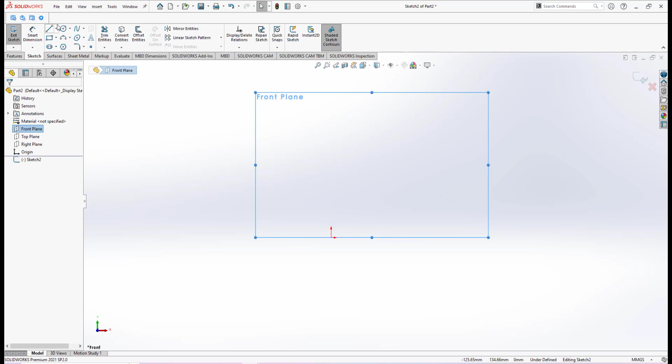In Solidworks, make sure the unit is MMGS, then we will work on the front plane. In this front plane, I will create a center line from the origin, and the dimension of the container is 110.

Then I create a line at the top, horizontal, and give a dimension. Since the diameter is 125, the radius will be 62.5, and since the bottom diameter is 90, I will create another line here, and the dimension is 45.

Then I will do a spline here. For me to create this curve, I will do a straight segment here. First I will create a vertical line from here to here, with a dimension of about 8.

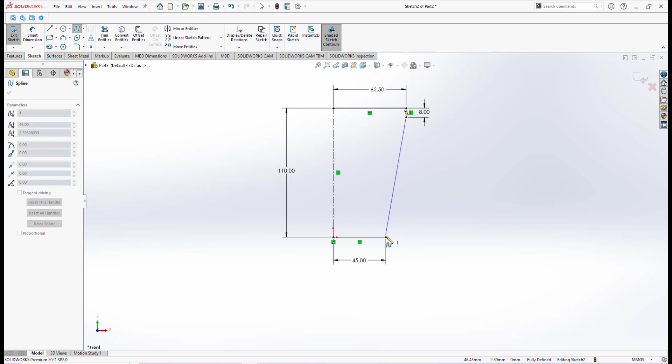Then for me to do this curve, I will do a spline. So here we have spline, then I will do the spline, just only a 2-point spline, and click OK. At the first angle, I select the arrow and the control point here.

Let's make sure that it flows to vertical. So let me do some adjustment of the spline to make sure we have contours like as shown here. Okay, I think the curve is about right.

So then what I will do is close this shape and connect to this line. I will do revolve boss base, and the axis of revolution is this line, making sure it's a full circle. So now we have the base shape for our bottle mini blender container.

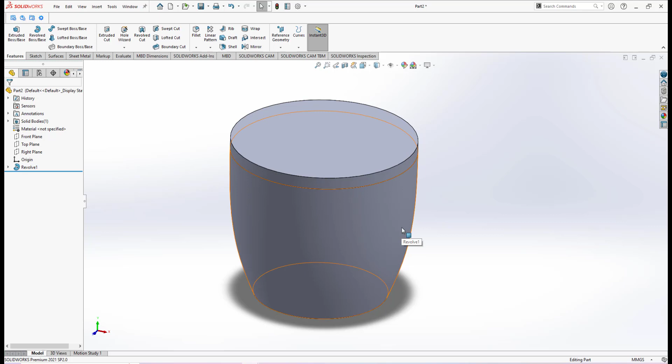In order for me to do this cutout of the bottle container, the best approach I found is to use the most basic method - a revolve cutout. I've tried using a wrap command and also a projection method, and I think it's quite tedious to do the cutout using that approach.

So the best method to make this groove is to use a revolve cut with a certain angle, about 40 degrees. Let me show you in Solidworks.

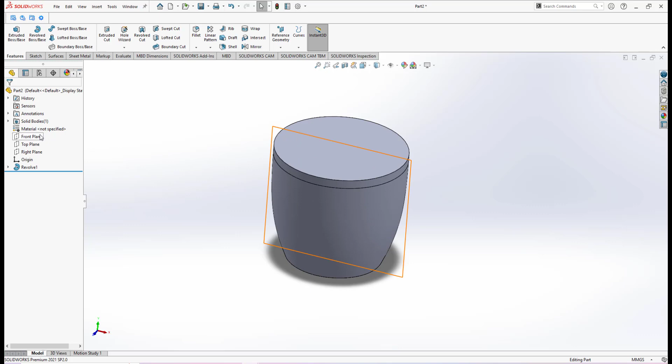So I will work on the front plane, create a sketch here, and first thing I create a center line here from this base up until that middle point.

So my approach to do this cutout is to use revolve cut. It means I have to create a certain profile - a proper shape here to be cut out, revolved at an angle of 40 degrees.

In order for me to do this cutout, I will select these edges, then convert those edges to entities, so we have a trace of that edge. Let me go to normal view again.

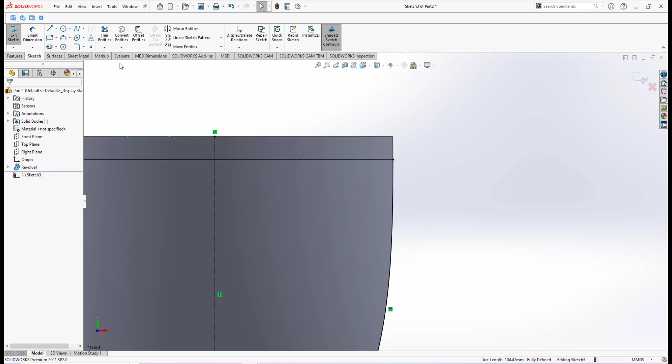So what I will do is duplicate this edge. To do duplicate, I will use the copy command - take note on this. I have this edge, and to copy it to the left, we have an option under sketch, under move entities - we go for copy entities.

Entities to copy will be these edges that I just traced, and the distance - if you look on the axis, to the right is positive x-axis, but we have to copy to the left, so it will be on the negative x-axis. The distance I need to copy is about -3, so here delta x I will put -3. This will create a copy of it, and I just click OK.

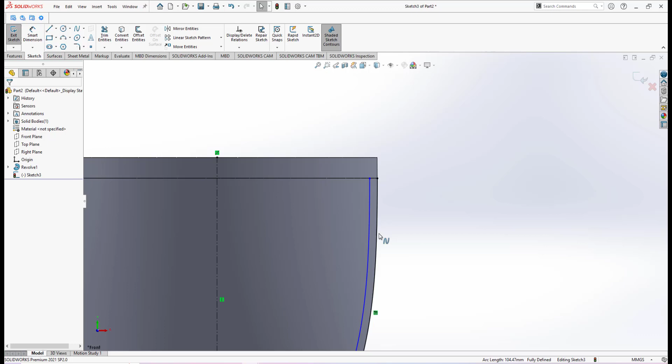Click OK, and now we have a copy version of the trace of the edges. Another thing - the cutout, I already measured it, so I make a line from here to here, a straight line up until it touches that edge. The distance from this line to this endpoint is 3, and also this dimension is also 3.

So I have this, and I also need to close it. Then I create the line from here to here to close the loop.

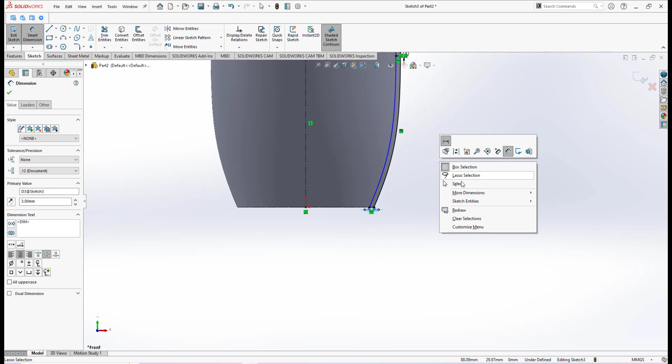I also give a dimension of 3. So in order for me to do this cutout, it's not quite necessary to make it fully defined, as long as I have the closed shape and give some distance here.

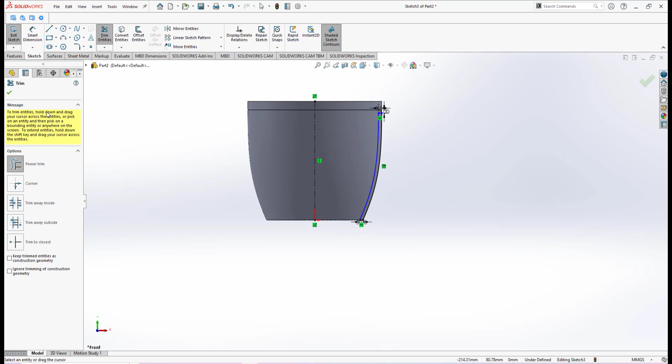Okay, then this portion will be trimmed. Let me trim this portion. So I have a kind of enclosed shape for me to do a revolve cut. Then I click OK. So this will be the portion for me to do the revolve cut.

So we go to Features, we go to Revolve Cut. It's already set under axis of revolution. If I clear here, the axis of revolution will be the center line, and it already detects the profile to be revolved, but we're not using a full circle.

I only need to revolve cut a certain portion, so I'm not using blind, I'm using mid plane. Using mid plane means it will revolve cut in both directions, and the angle is about 40 degrees.

So this portion needs to be revolve cut. Then I click OK. So we have a cutout of the base shape of this container.

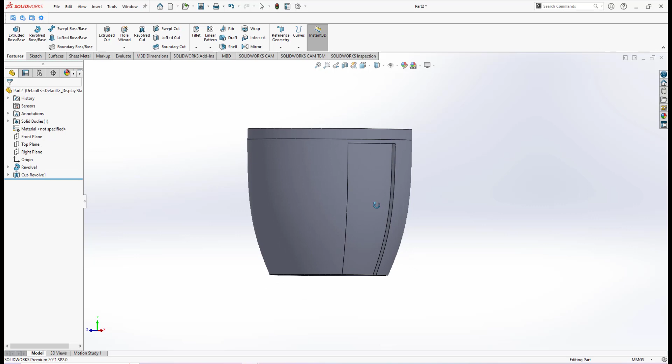After we have made the cutout, I will do a fillet, since in this photo they have a fillet at the bottom here, and the fillet radius is about 5 mm.

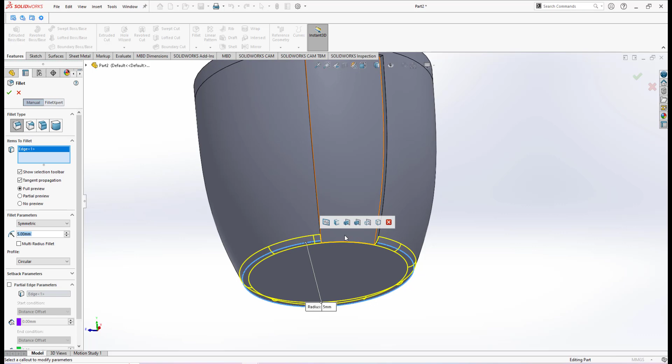So under Features we go for Fillet, the radius is 5 mm. Then we select all the edges, including these edges. Let me clear this first. I go for this fillet, then I call Fillet again to fillet these other edges for 5 mm. It means we have to do fillet 2 times.

Okay, at the bottom we have a fillet of 5 mm. Then I will fillet these edges of radius 15. I select this edge and also this edge of radius 15.

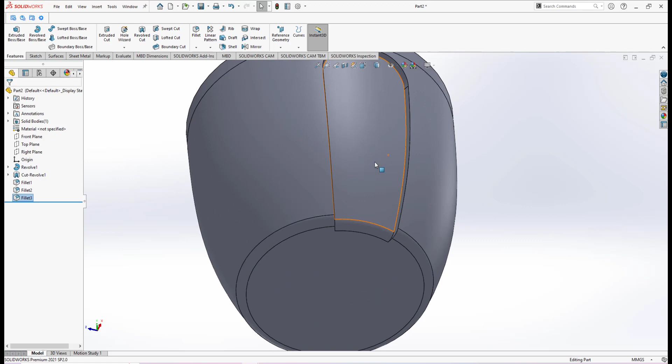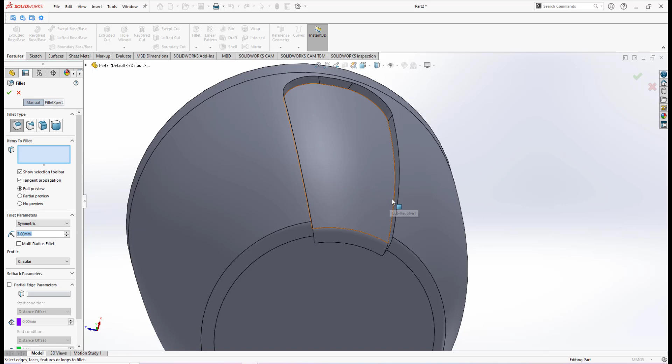Okay, we have... the next thing is at these edges, since these are all sharp corners, sharp edges, so I need to do fillet at these edges. For these edges I will do fillet of radius 3, and I select these edges, so we have a more curved surface.

Then I click OK, and I do fillet again of radius 1 for these edges, so we have a more curved surface rather than sharp edges.

Okay, the next move is for me to do a repeated pattern of this groove. If you look in this photo, this cutout here has a repeated pattern of 4. So in SolidWorks I will do a repeated pattern of this.

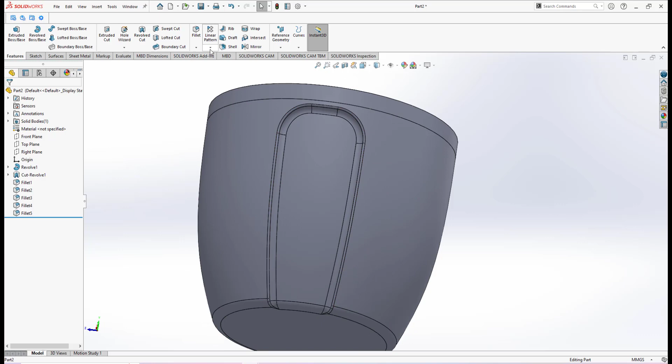Under linear pattern we have circular pattern, then for the direction I will use the cylindrical surface, and the angle is 360 degrees, and the number is 4. Be careful about the features selected.

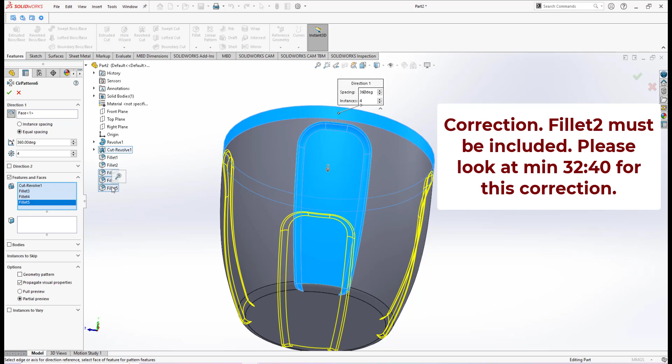Then I click OK. So I have the repeated pattern of this groove.

If you look in this photo of the sketches, the bottle container thickness is 2 mm, so I will do Shell to give a thickness of 2 mm. Under Features I go to Shell and give the thickness of 2, select the top surface, and click OK.

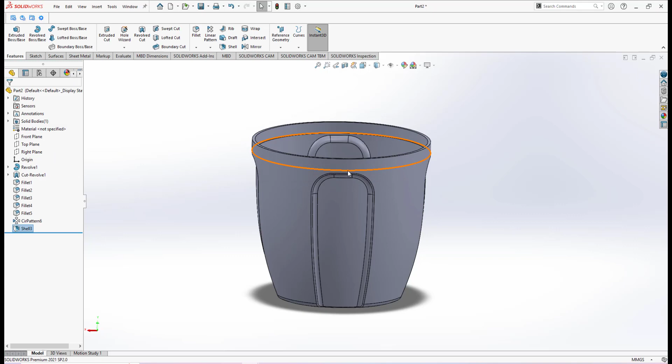Sometimes SolidWorks reminds you of the minimum radius of curvature, but for this training purpose, we just simply click OK, as long as it forms the thickness of 2 mm. So now we have a bottle container.

Another thing to do: if you look at the appearance of this original bottle container of this mini blender, the appearance of this groove is kind of like a straight vertical cut. So I make a certain modification.

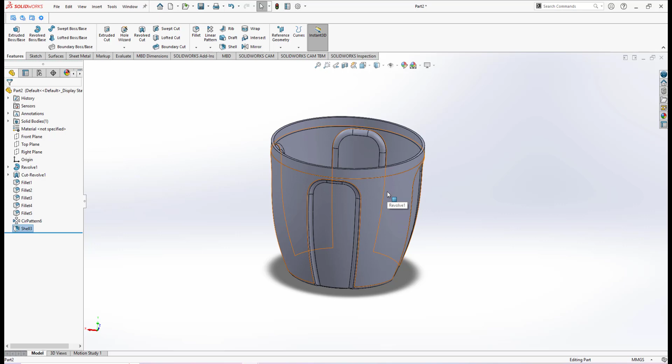I want to make it twisted with a certain angle, because since this is a mini blender, when we pull the handle it does a kind of spinning of the rod at the middle and the cutting blade. So I need to make the appearance look more pleasant.

So the groove here, I want to make it twisted at a certain angle rather than the original one, which is just a straight cutting, vertical cutting.

So I just make some modification to improve the aesthetic look of this bottle container. The groove here, I want the appearance of it to be twisted at a certain angle. To do that in SolidWorks, we can do that under Insert, Features, we have Flex.

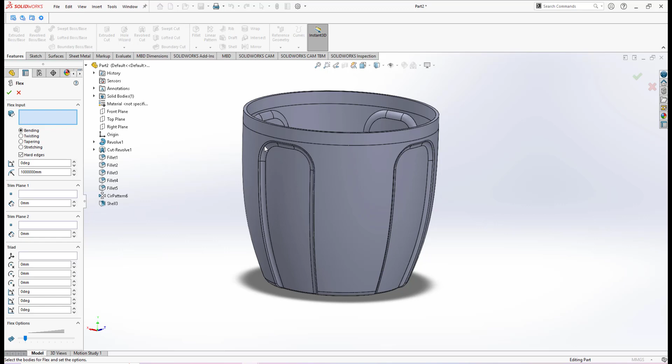The command is flex. Flex lets you change the shape of your solid object. We have some menu options here, but the thing I want to do is twisting.

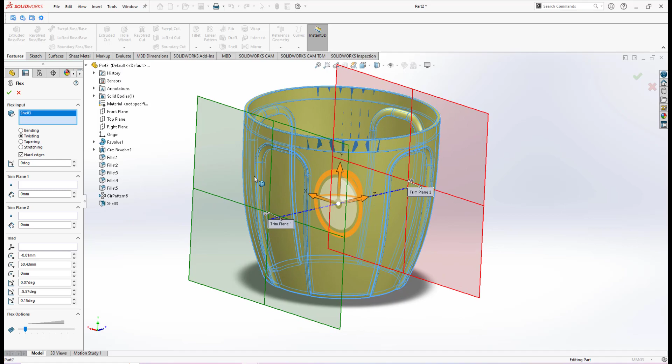Make sure I click on twisting, because I want to do a twisting effect at an angle. The flex input here will be the body of this container. This is a gizmo setting for how we control the twisting, but it looks like the twisting effect of the red plane and green plane goes in the Z direction. So this is not the direction of orientation or twisting that I want.

If my twisting should be at the top and bottom plane of this green and red color, in order to do that, make sure under X here I go for 90 degrees, and the remaining Y and Z I put at 0 degrees. So the setting of my twisting for both the green and red plane is right.

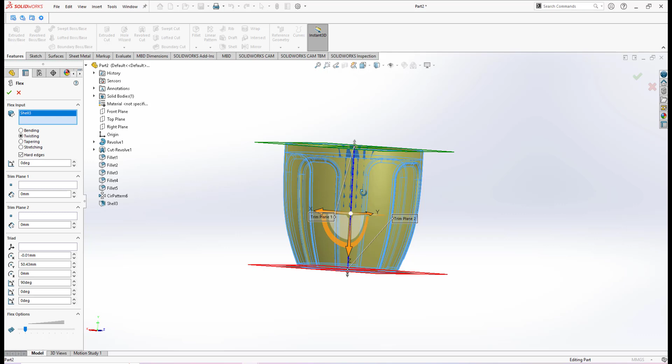Under here, the angle I want to make 45 degrees, so it goes in the direction of 45 degrees. Then I click OK. We have to wait for a while for SolidWorks to calculate it.

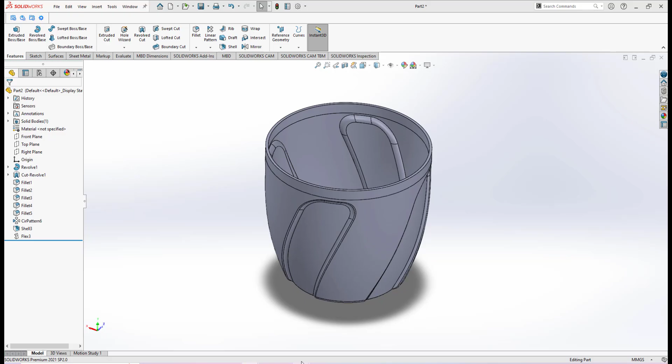So I have a twisting effect now. To me, this looks more pleasant compared to the original one, which was simply a straight cut. This looks more aesthetic than the original.

All right, let me save it. Save it as container.

Our next move, if we look again in this sketching and zoom in a little bit, we have a cutout here at the top edge. We have a cutout of 5 deep and 0.5 thickness for the cutout.

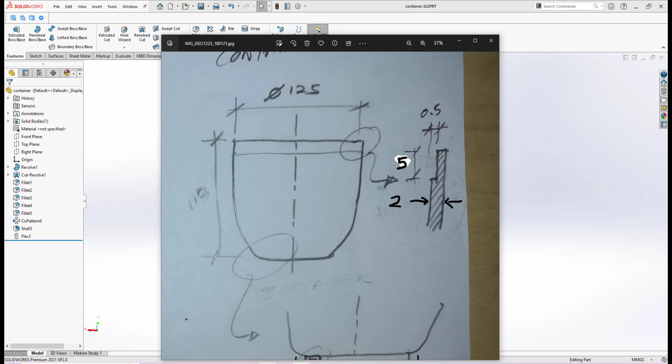So what I will do is use this top plane. I create a sketch at that top plane. The distance of the cutout is 0.5. Let me select this, making sure we select the proper internal edge.

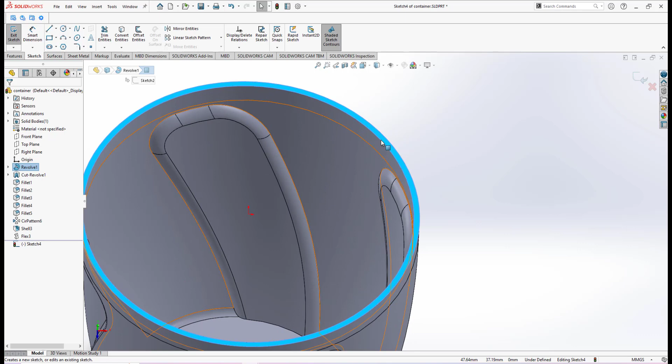Select this edge and convert it to entities. Then I do an offset of 0.5. Then I select this edge and make sure to go for reverse, into the inward direction. Make sure to uncheck reverse so you go in this direction, giving us an extra 0.5 here.

So I have these two circles to use as my profile for the extruded cut, with a distance of 5. If you look here, the sketch depth is 5, so the distance of the extruded cut is 5. So we have our cutout.

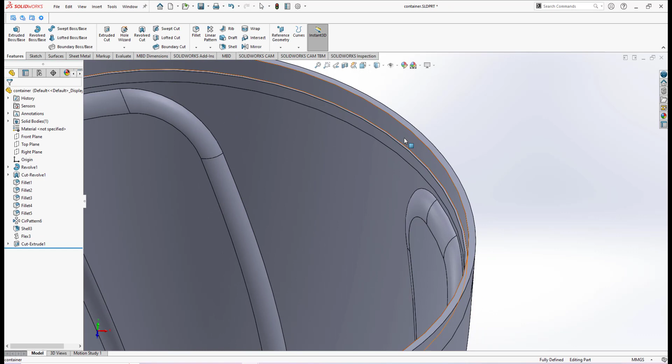This cutout is meant for us to mount the middle plate that I already did in the previous video. It will be mounted until it stops at this plate.

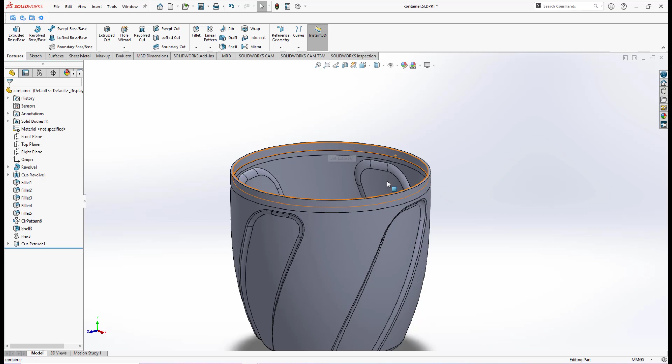Our next move is that I need to insert the middle plate component that I've done before into this container modeling. The reason I insert this middle plate into the bottom container is to put it into the correct position so I know the position of the key.

If we look at the middle plate that I've done before, we have a slot here. At this container, after I put this middle plate at the correct position, I will know the location for me to do the key.

So the key will slide into that slot, then it will lock the middle plate to this container.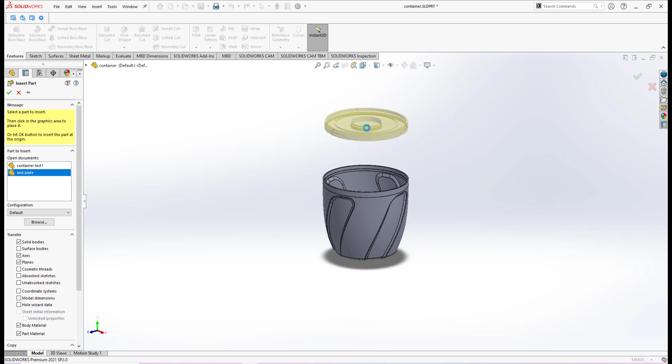In this container modeling, I will insert a part - the middle plate. Make sure it's somewhere at the top here, then click OK. Just click yes.

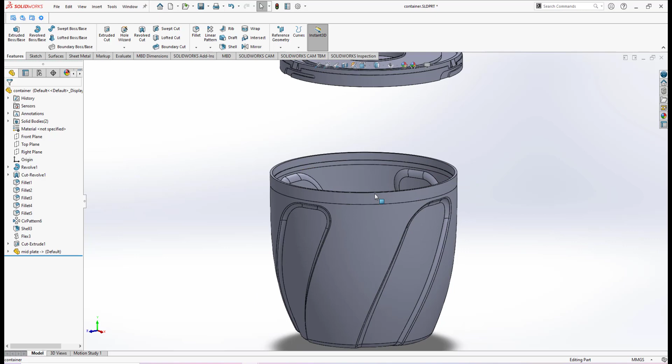One thing I found out - since in this container modeling I previously did a twisting effect, when I want to do a mate setting with a concentric relation on this cylindrical surface, unfortunately SolidWorks loses the properties of this cylindrical surface because of the flex modeling twisting. So SolidWorks has lost the concentric surface reference.

This means I have to create an extra circle here. At this plane, I create a sketch and just make a circle, making sure it's snapped at the center at any radius. This circle will be used as a reference for our mate setting relation for concentric.

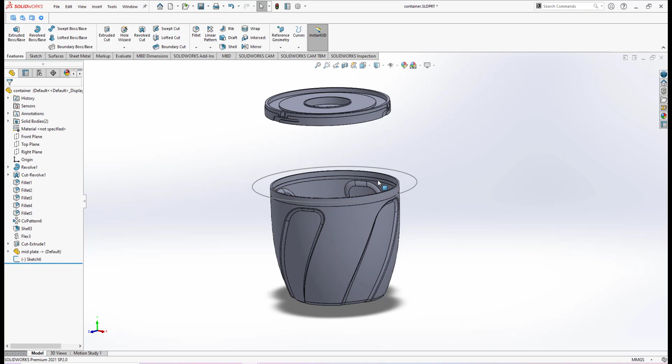This means we need to position the middle plate to be concentric with this container. I will go to move/copy features to move this middle plate, under the mate setting. That's why I created the circle here on this bottle container.

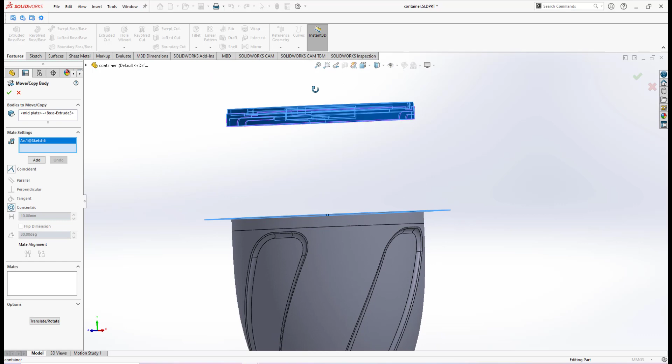I create a circle to be. I have the relation of this edge of this circle to mesh at any circular edges of that middle plate, so it has a concentric effect.

Then I click add, so the middle plate is positioned to concentric. The next move is to select this bottom surface of this middle plate to be coincident with this bottom surface. Then I click add, then I click OK. Now our middle plate is in correct position.

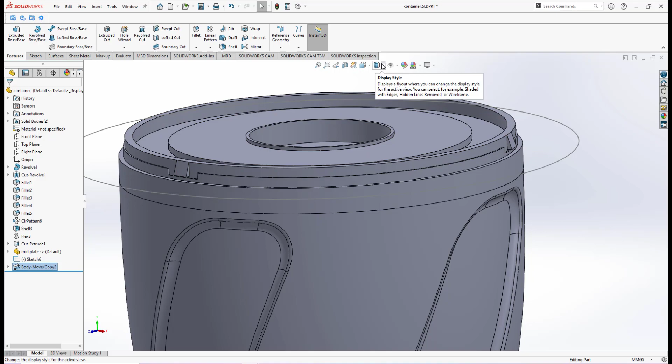From here, I need to know what is the distance of my key for the slot of the middle plate. So in the display style, I can switch to wireframe mode. If you look carefully, this is the slot of the middle plate, and this is the top surface of our container, so it means I have to create a key at this position.

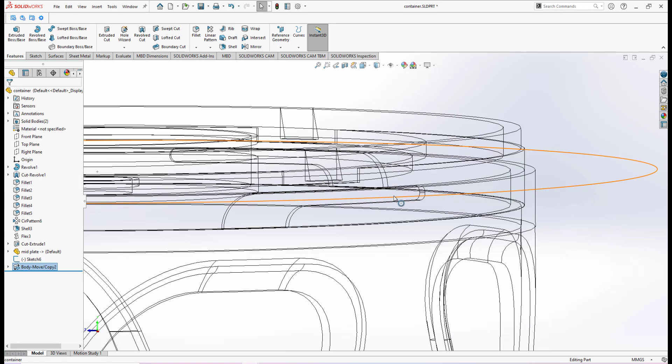I have to create a key, but I also found out that the radius of my slot of this middle container is 2 millimeters, the thickness, so I think it's too small. I need to increase it a little bit to make it like 3 millimeters. So I open the original middle plate modeling.

This is my middle plate. I've done this one, if you look, the distance, the radius is 1, which means the distance of the slot is 2. So I need to increase it a little bit.

So I do the wrap command here, this is my wrap sketch. I increase this one, instead of 2, to 3, to increase the thickness. So it means I have a bigger slot.

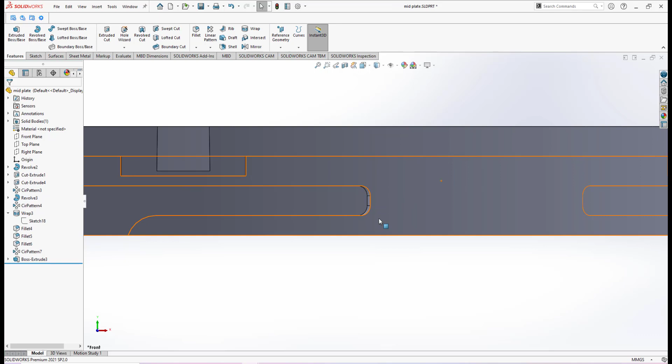Also the radius is not correct, so the fillet radius also needs to be changed. I edit the fillet. Since the thickness is 3, the fillet radius is 1.5. So we have a bigger thick slot distance.

So then I save my middle plate, then go back to the container part modeling. When I update it, my slot is a little bit larger than 2, it's 3 millimeters.

I can use this as a reference for me, checking the distance from these edges to this point. Let me evaluate and measure these edges to this point. We need to know the distance y. Distance y shows 1.5 millimeters.

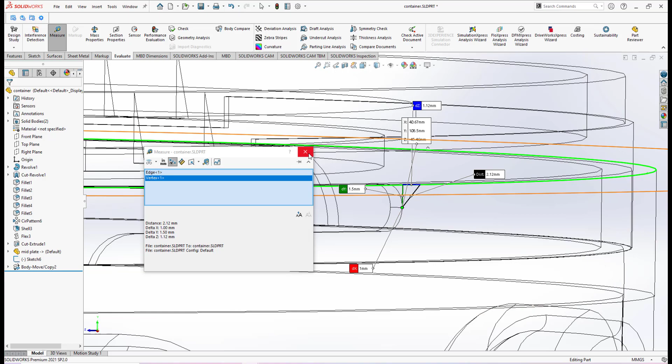So I know the position where I will create the key for the slot. I hope you understand what I try to explain. Under the features, let me go back the display style to shaded mode, then I will isolate this container.

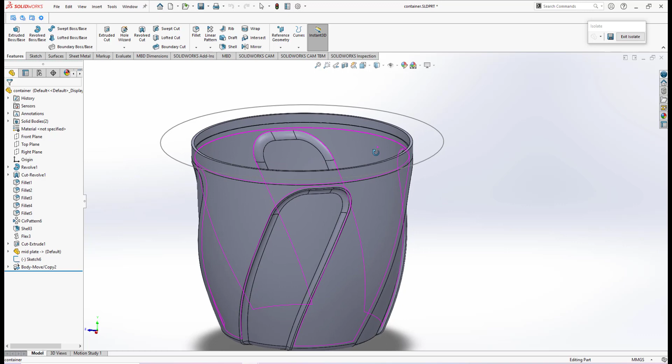Let me drag it here. Then I will create a plane, 1.5, using reference geometry plane. My first reference is this top surface, and I set 1.5 as the distance, and I go to flip offset, so it goes downward. So we have this plane number 7, 1.5 from the top surface.

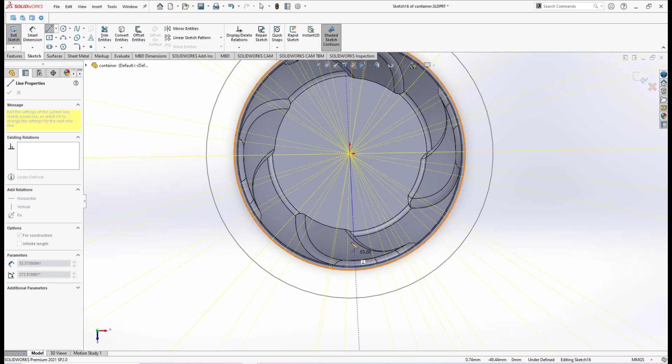So on plane 7, I will create a sketch. I will create a center line from the center point to this quadrant of the circular edge. That's one disadvantage, remember, this center line cannot snap to properties like the quadrant of the circular edge, that's the bad thing when we use the twist effect.

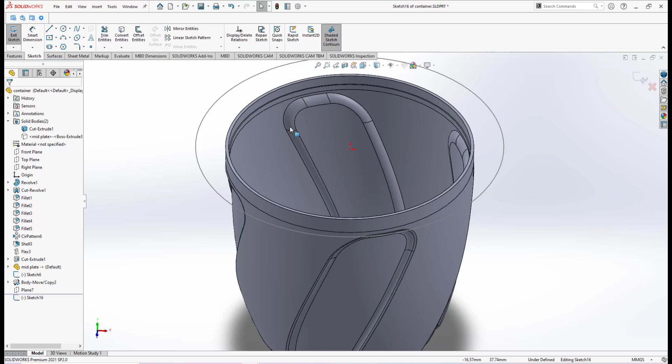Remember, I did twisting here. Since I did some twisting of this groove, Solidworks has lost, this container has lost all the properties like circular edges, cylindrical surface, and so on.

So in order to overcome this problem, let me exit this sketch. I remember the circle that I did here, this circle I can edit. I give it a proper dimension. Since the top diameter of the container is 125, I put a dimension of 125.

So I exit the circle. We can use this circle as a reference for our plane 7 to create the center line. So I go to plane 7 again, which is 1.5 below, and I create a sketch on this plane 7.

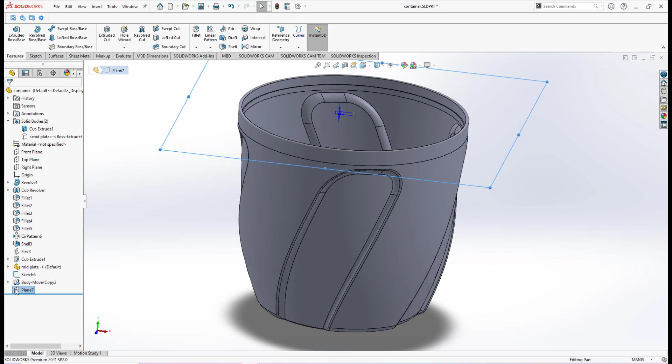Then I create a center line from the center point, and now it will snap to the quadrant of that circle. I just adjust the dimension. That's the reason for me, then I exit the sketch.

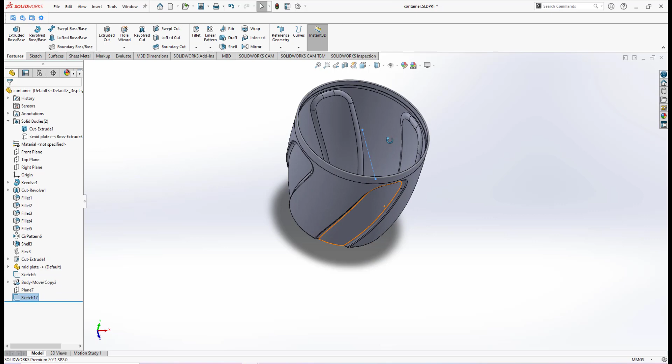The reason for me to do this center line is to create a normal plane, since I want to create a key at this internal part of this container. The key will be slid into the slot of this middle plate. So in this container, since I have already created the center line, I will create a reference plane.

So select the line and also the endpoint of the line. So I have a plane, plane 12. Okay, sometimes when you do things, your plane does not appear on the screen.

Sometimes make sure that under Hide/Show, your plane is not checked, it's unchecked. Whenever you create a plane, it will be hidden. So make sure that under view, the Hide/Show, your plane is checked, so it will show the plane.

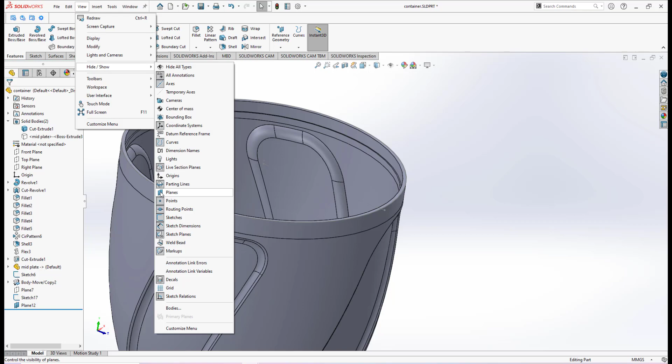This plane 12, actually I want to use not this plane 12, I will use it as a reference. This is my first reference at a distance of 3, but I go to flip offset, so I have another plane to the other side.

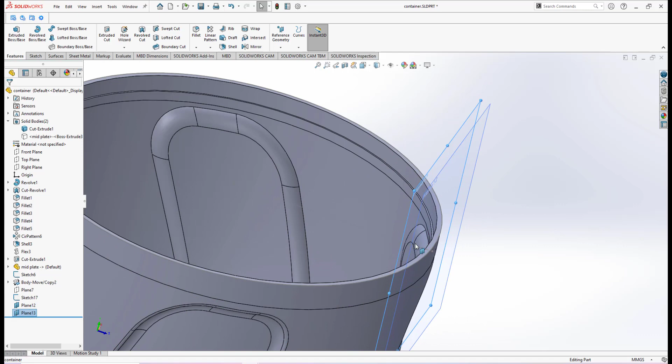So that plane 13 will be the location for me to create the key. So this one, the plane 12, I turn off. So this plane 13, I create a sketch on it. So I have a normal view.

Then I will create a center rectangle here, anywhere on the screen. Then I will position the center rectangle. I select the middle point of the rectangle and hold down my control key and select the center line and make pierce. So it will position the rectangle to the origin point.

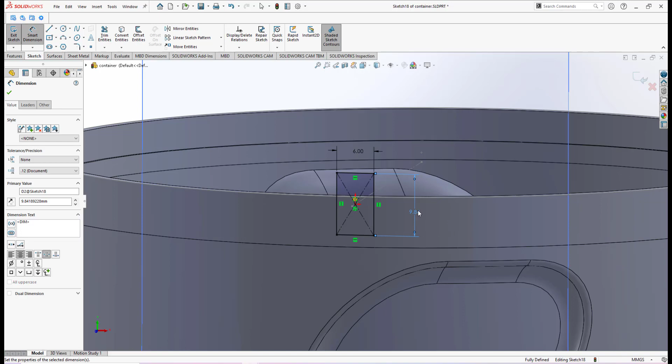Then I give a dimension of the length of this key is 6, and also the height is 2. So this will be the profile for me to create the key of this container. Let me drag the view. Alright, then I will do features.

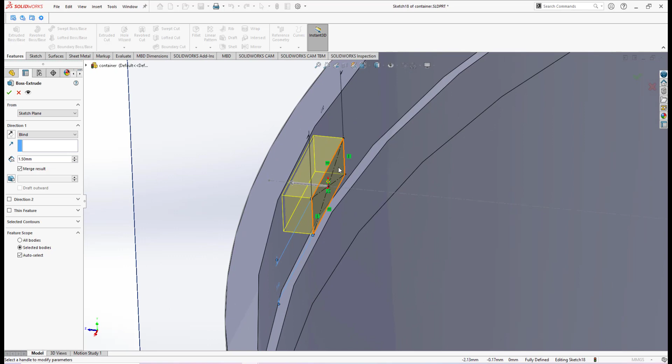Okay, this is very important. Then I will do extruded boss base. The option that I use for extruded boss base is not from the sketch plane. So when you use sketch plane, it means your starting point is a flat surface. But for my key, instead of using sketch plane, I have an option here from surface plane.

From surface plane, then I select this internal surface. So it will start at that surface. Then I can give the distance, the length of my boss extrude. So the length, since the direction is outward, I need to click reverse direction. So we will go to inward direction.

The length will be 1.5. So it will create a key. But one thing that is also very important, I will not check the merge result. I will uncheck merge result, because this will make a separate body of the key.

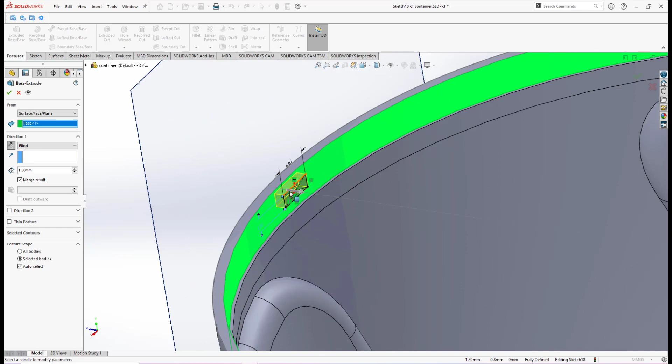Why do I not click the check? If I click merge result, since there will be kind of... I've already done this just to remind you, for this kind of key, I will uncheck the merge result, so it will create the key as a separate body. So then I click OK.

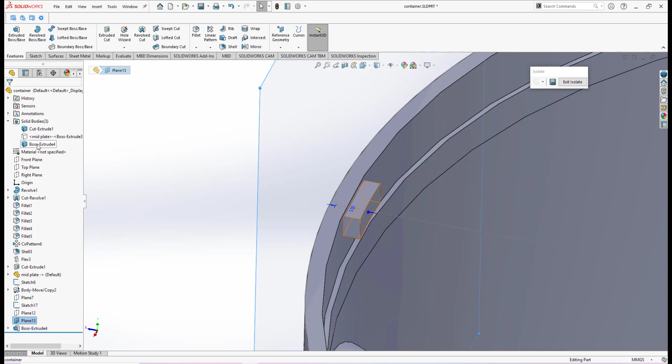So then I have a key at this position. But if you look under the listing, we have 3 bodies here. One is cut extrude, the container, the mid plate that we just hid, and boss extrude is the key.

Alright, then the next move is I will do a fillet to this key. I will do fillet since the thickness is 2, so my fillet is 0.5. So I will fillet this... the thickness of this key is 3, so the fillet is 0.75.

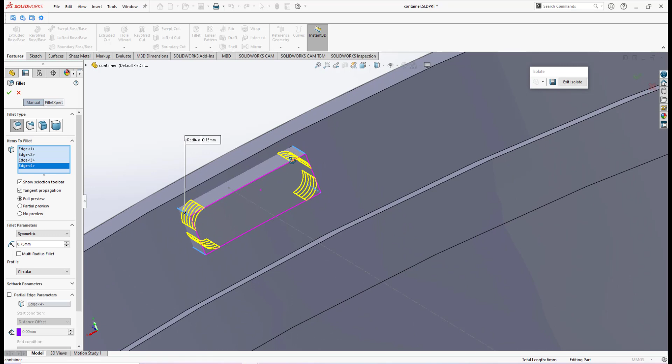So I select all these 4 edges. My mistake, my mistake is 1, supposed to be 1. Since the thickness is 2, the fillet will be 1. Alright, so this will be the fillet for the key.

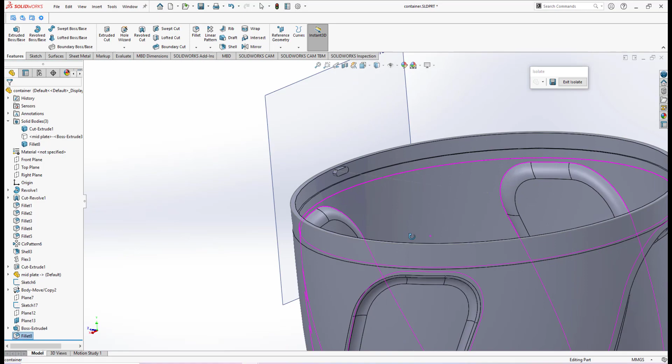So this key is a separate body. So what I will do is circular pattern. Circular pattern of this key. Remember, if I try to do circular pattern, when I try to go the direction, any cylindrical surface of the container is already deleted. Why is it deleted?

Because I have used a twisting effect here. The one bad thing about twisting effect, when you do a twisting, the properties of this container lose the property of cylindrical surface or circular edges. So my reference will not be this bottle container.

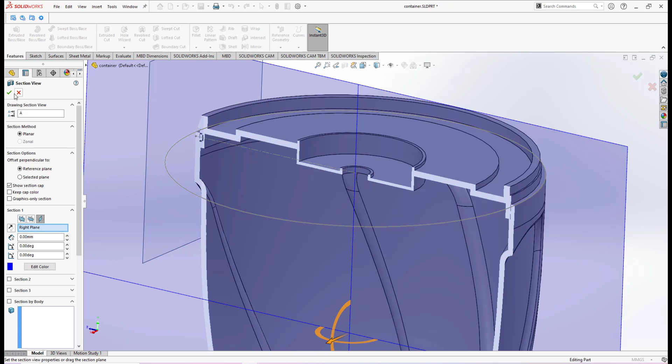So I exit the isolate. So I have this middle plate. I will use the cylindrical surface of this middle plate to be the reference for my circular pattern. Let me go for section view so I can see the key. Alright, so this is a section view. Okay, now I can do circular pattern.

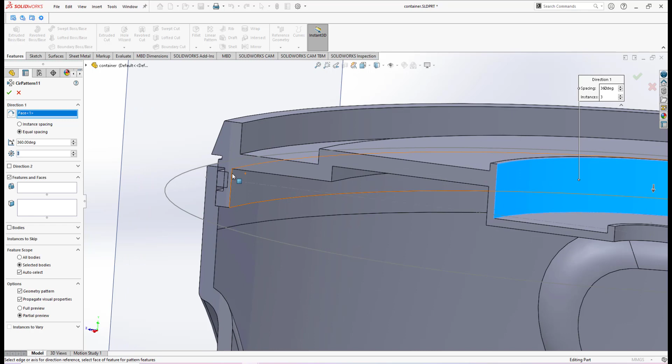Under circular pattern... sorry, under features here we have circular pattern. Okay, for direction I can go for the cylindrical surface of this middle plate, and the angle is 360 degrees. The number is 3. But I'm not using features because since I need to circular pattern the key, and the key is a separate body, instead of features, I check bodies.

We circular pattern this body. So I select the key, then click OK. We will have 2 more of the key. Let me uncheck the section view and hide this middle plate. As you can see, we have 3 keys after we've done the circular pattern.

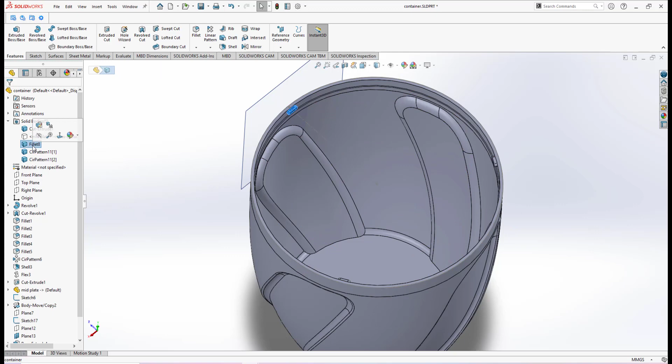These 3 keys are separate bodies. If you look here, we have one key, a second key, and a third key, all separate bodies. So we need to join them to the container. To join it, I go to Insert Features, use Combine, then Add, then select the container and select these 3 keys to be joined as one. Make sure the option is Add, then click OK.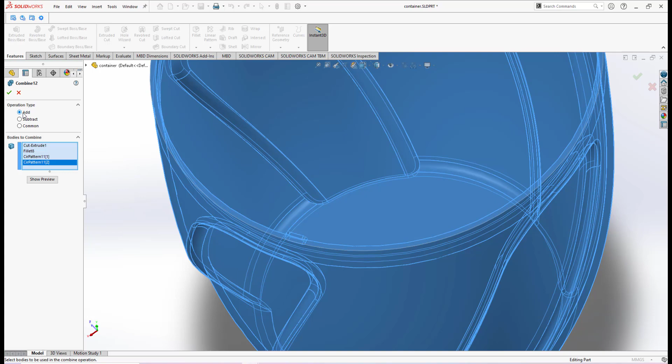Alhamdulillah, I've completed this container with 3 keys. The next thing to do, let me check this container.

Alright, I think I made a silly mistake here. If you look at the cutout, previously I showed you how I made the cutout of this groove, and the pattern is 4. I forgot to include this fillet into the features of the circular pattern, so we don't have this cutout fillet here. So I need to edit my circular pattern again.

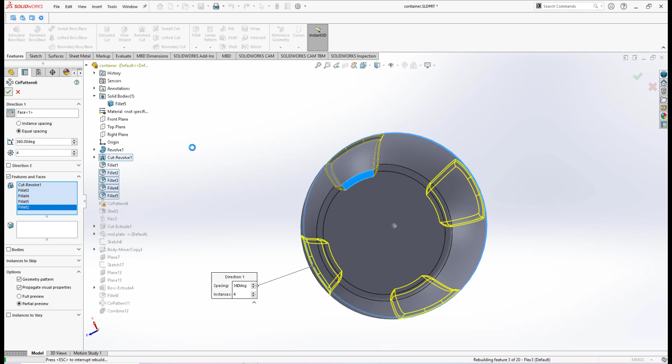In these features, I need to include the fillet too, and then click OK. If a rebuild error happens, I have to check the geometry pattern, click OK, then click OK again, then wait for Solidworks to do the recalculation. Now it looks okay to me, let me check.

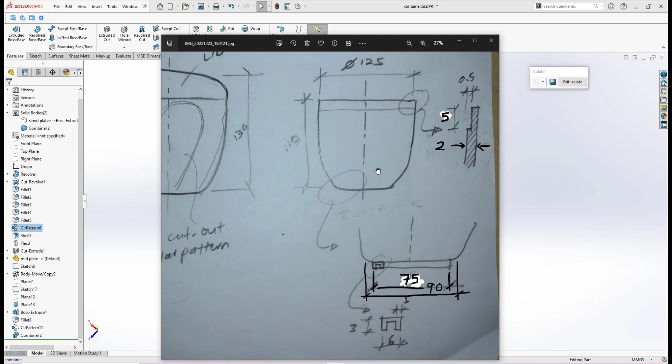Alright, okay. The next thing is, if you look at this photo sketch, I already made a modification. At the bottom, we have a protruded cutout cylinder, the height is 3 and diameter is 75. These are the cross-section shape of the cutout, and I can do this by revolve boss to the center line. I have to do the cross-section at the bottom of this container.

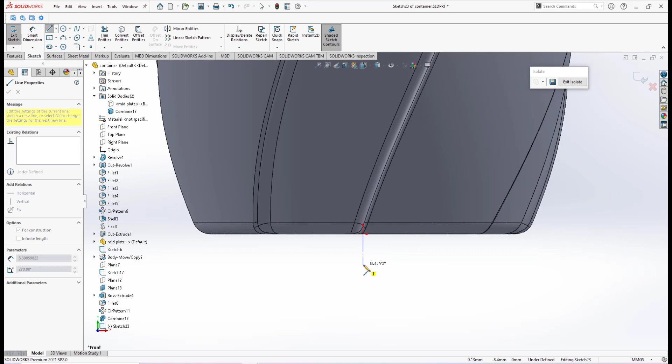So let me go to the isometric view, then under the front plane, I'll draw a center line here, make a center line, then draw a cross-section shape, making sure it's snapped at the bottom edges. Let me zoom in a little bit. I draw the cross-section shape as shown in this photo. The cross-section shape needs to be revolved, the length is 6, the height is 3, and all the thickness is 1.

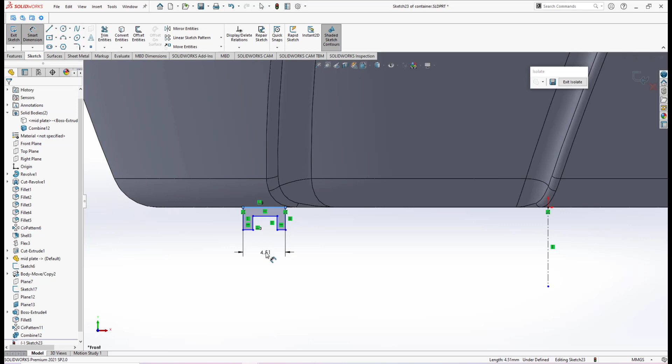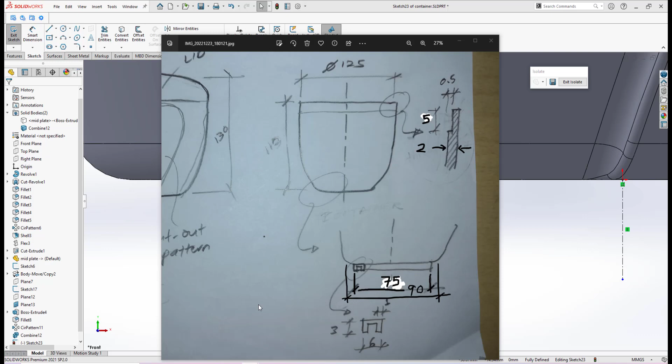So I give a dimension, this is 6, and this is 1, and the height is 3. I need to set this relation into collinear, and I need to give the dimension from here. If you look at this photo, since the diameter is 75, the radius is 37.5. So I give the dimension from this point to this point as 37.5.

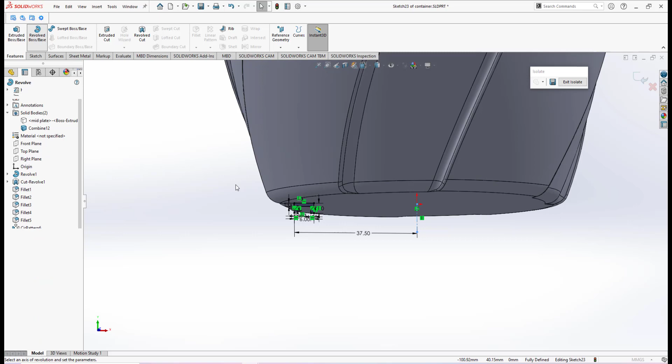So I have the right position for me to do revolve boss. Make sure it's a full circle, and I click OK. So I have this feature. This groove here, later I will do modeling of a circular ring, a rubber ring.

The idea is for rubber to be fitted into this slot, this groove, to add some extra friction to the bottom surface of this mini blender.

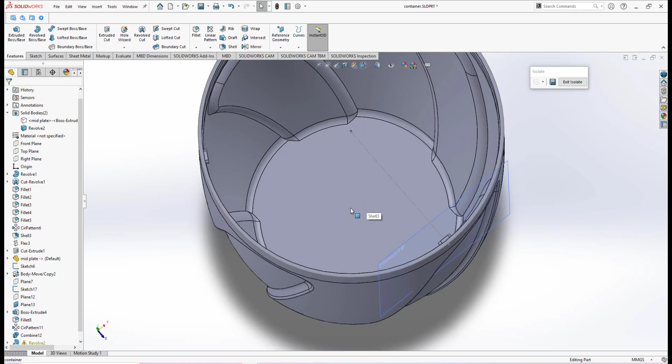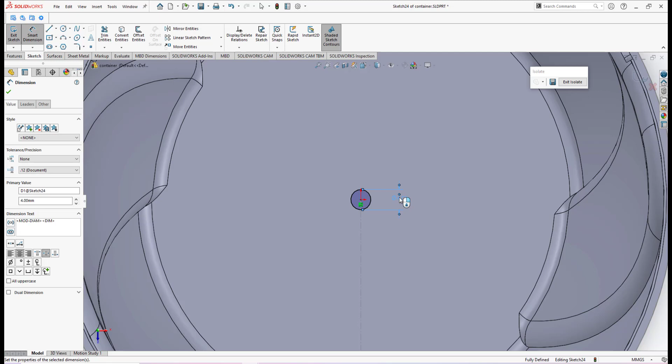The last thing to do, we have a plane surface here and a small shaft at the center of this bottom surface. I will do a sketch on that plane, and I'll make a circle of diameter 4. Then I will do the boss extrude - let me check my bottle container, I think the height is about 10 units.

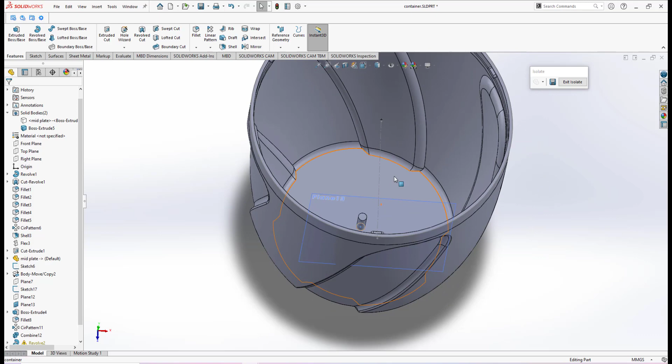So this small shaft at the bottom surface of the container will act as a guide. There will be a rod here that has blades, some blades, and the rod has internal holes that will be mounted here, with this shaft supporting it as a guide for the rod to be rotated on. So I think the last thing I need is to add some chamfer here.

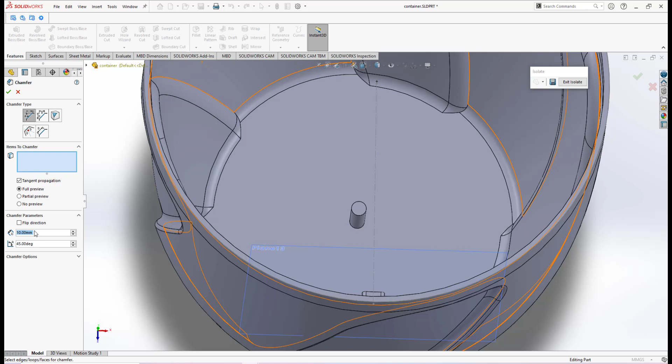Let's go for chamfer, 1 millimeter. Alhamdulillah, I have completed the part modeling of this container of the mini blender.

Inshallah, in the next video I will do the other parts, like the internal gears, the rod with the attaching blades, and some other components of this mini blender.